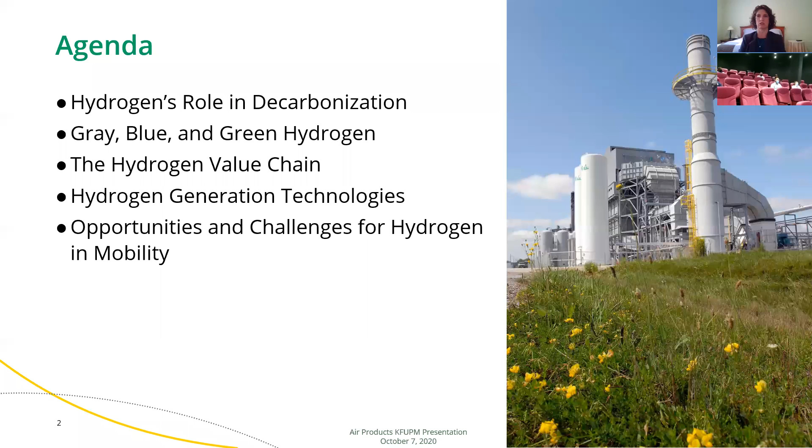So global warming is worsening. Reduction of CO2 emissions is urgently needed. You can see it all over the news lately, the impacts of climate change. If you look over the past century, you'll see that carbon dioxide emissions have been ever increasing and don't look to stop increasing anytime soon. And with this, the global temperature has also been increasing.

As a result of this, we're seeing impacts to our world, our planet, such as melting of glaciers and more frequent, more extreme weather events, things like fires in Australia or the western part of the United States, major hurricanes, and all kinds of record-setting high temperature events. So it's really important that we start to pay attention to the amount of carbon dioxide that we're emitting to our atmosphere to really start to turn this around to preserve our planet for the future.

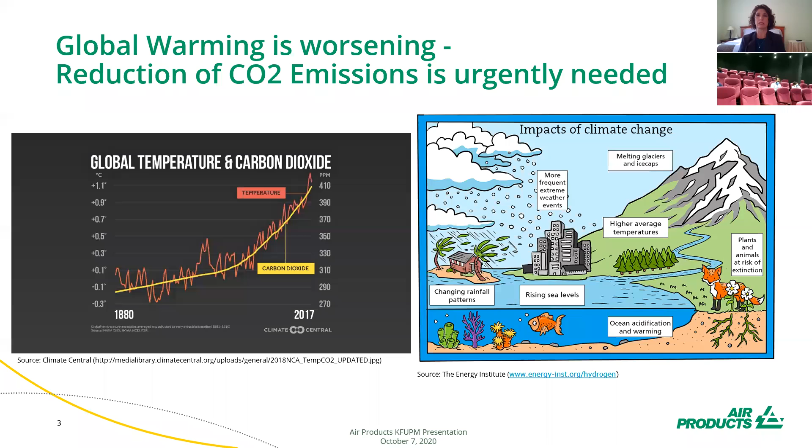So one way that we can obviously do this is to turn to renewable energy, in the form of wind, solar, and hydropower. That is one way that we can get away from the fossil fuels that we've been using over the past century, pulling up from the ground, releasing the energy, and then emitting that CO2 to the atmosphere. But renewable energy alone cannot solve this problem.

If you look at the pie chart on the right, you'll see a breakdown of some of the sectors that emit greenhouse gases to the atmosphere. And what you'll see is that for about a quarter of those sectors that emit CO2 to the atmosphere, it would be very difficult for us to eliminate those emissions using renewable energy alone. And so we need to find another way to do this.

And some of those things that are hardest to eliminate are things like cement and iron and steel and shipping and long distance transportation. And these are all things that continue to grow as nations and regions develop and become more industrialized. So the graph that I have on the left, let me pause here for a moment to see if I can bring up a pointer. So the graph here that's on the left shows the global emissions by various regions in the world.

And as you can see, in the early 1900s, it was primarily the United States and Europe with the Industrial Revolution that was starting to emit a lot of carbon dioxide. But as we progress through time and other nations and regions are developing, you can see places such as China where their emissions have expanded quite dramatically in the recent years, and other regions such as India and the Middle East, which are following the same trends.

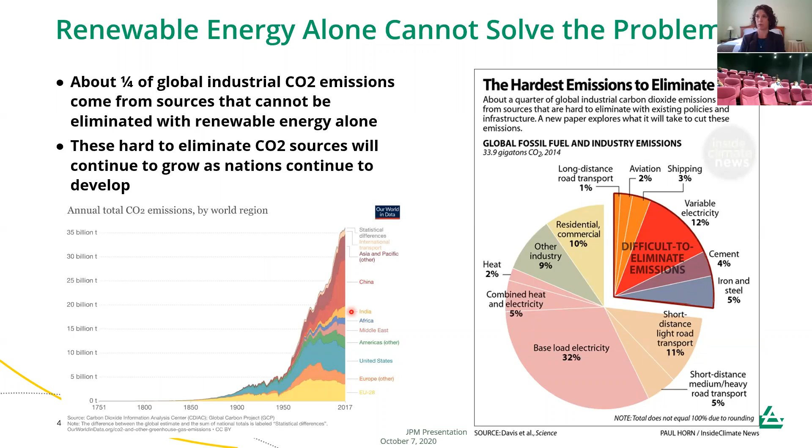So we need to find a way to curb the CO2 emissions that just naturally come about with nations and regions becoming more developed and more industrialized. So hydrogen can be that versatile carbon-free energy carrier that can help us to get there.

So this chart here shows, again, a breakdown of the various segments that emit CO2. And there are some, such as agriculture and forestry, that we're not going to be able to solve with hydrogen. But about 65% of the sectors that are emitting greenhouse gases could be addressed with hydrogen in some way as we move forward, whether it be with building and heating needs, or with other industries, transportation for sure, and even generating other electricity and heat and replacing coal in certain areas. So hydrogen has a big role to play in decarbonizing our world.

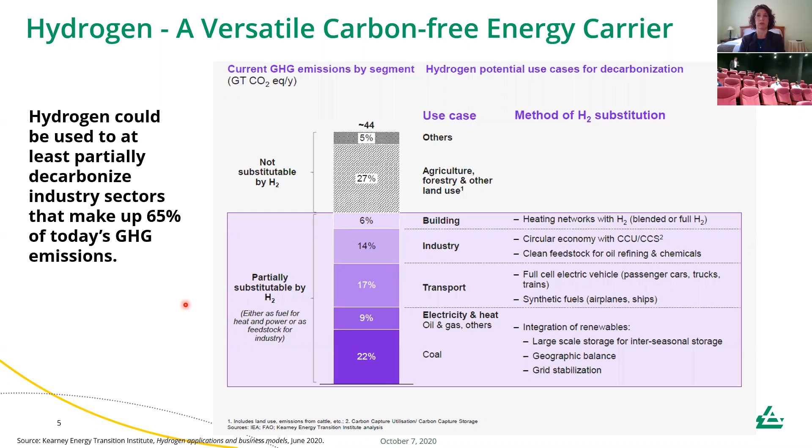But all hydrogen is not necessarily the same. So that brings us to the definitions of gray, blue, and green hydrogen. Gray hydrogen is what you would consider 95% of the hydrogen that's generated in the world today. This is hydrogen that is generated with fossil fuels. It is not low carbon. All of the carbon that goes into the process is emitted from the process. It is released to the atmosphere, and this is how hydrogen is primarily made today.

But we're seeing a shift where governments are starting to enact tax credits and other such things to encourage corporations to decarbonize. And that brings us to blue hydrogen, where we can still use this energy source that we have today, but now with blue hydrogen, we are capturing that carbon dioxide and not emitting it to the atmosphere. And rather, we're either sequestering it or finding a use for it in some other way. So that's blue hydrogen.

And that blue hydrogen could be a stepping stone to get us from the gray hydrogen, where we're emitting lots of carbon dioxide, to blue hydrogen, where we're reducing our carbon emissions, and then ultimately to green hydrogen, which is completely renewable and very low carbon. In fact, with electrolysis, it can be zero carbon dioxide emissions.

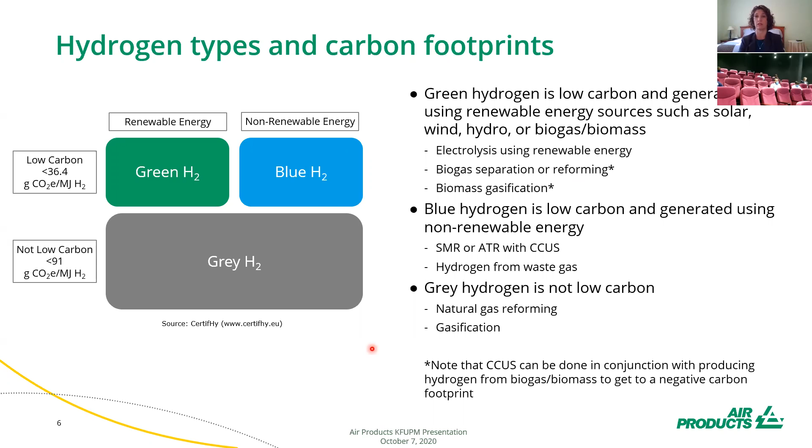So now we're going to move on to talk a little bit about the hydrogen value chain. And I really like this particular slide because it kind of shows how hydrogen is linking natural gas and power together, and how powerful it really is. So here, I'll start at the top with the power grid. There are several different ways we can add power to the power grid. We can use renewable power, such as from a wind turbine or solar panels.

We could use fuel cells, such as hydrogen fuel cells, and we can use combustion turbines to put power into the power grid. That power off of the grid we can then use for electrolysis by adding water and making hydrogen, and that hydrogen can go to end users. We can also make hydrogen in a more traditional fashion from natural gas or from coal or oil or other hydrocarbon feedstocks, and process that hydrogen, remove the carbon dioxide, and again put that into this hydrogen grid, if you will.

And they also show here that we can even potentially take some of this carbon dioxide that's captured and go through a methanation process to make methane to inject in the grid. Or you could use biomass and clean that up and put it into the natural gas grid. But you see here how hydrogen ends up connecting our power grid, our natural gas grid, and ultimately we can use this to result in low carbon energy sources that can be used for downstream processes.

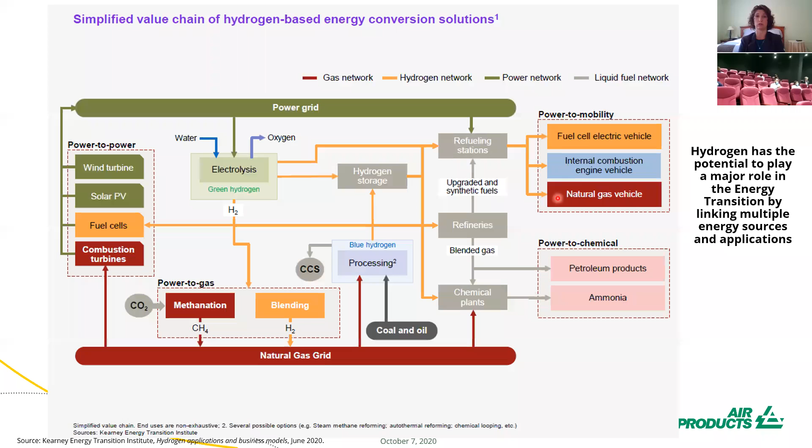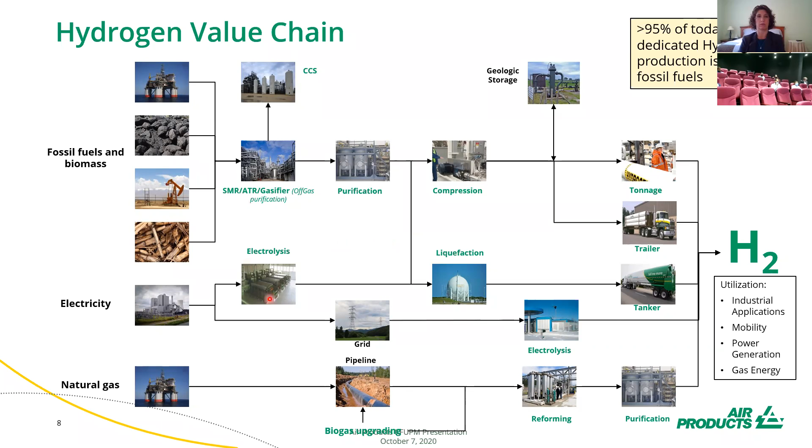So I'm now going to get into how do we make hydrogen? What are some of the means we use to generate hydrogen? Specifically looking at these different reforming and electrolysis methods. So I'll start with showing how different methods of generating hydrogen generate different syngas ratios. So we have electrolysis at the top here that generates essentially pure hydrogen. And then at the bottom here, we have our gasification technologies, which you can see produce a much greater amount of carbon monoxide with that hydrogen. So it's a much lower syngas ratio, if you will, of hydrogen to carbon monoxide in these regions.

Steam methane reforming, you'll see, is very close to the top here in terms of the amount of hydrogen it produces relative to the amount of CO that it produces. And for this reason, steam methane reforming is generally the preferred method of making hydrogen today. Autothermal reforming is a close second in terms of the hydrogen to carbon monoxide ratio that we can generate. And I'll talk more about both steam methane reforming and autothermal reforming in a minute. And then, as I mentioned, gasification generates the lowest hydrogen to CO ratio. And then for each of these technologies, we can use pressure swing adsorption to generate a pure hydrogen stream to purify that syngas. We can also use membranes and again, either adjust the syngas ratio or purify the hydrogen.

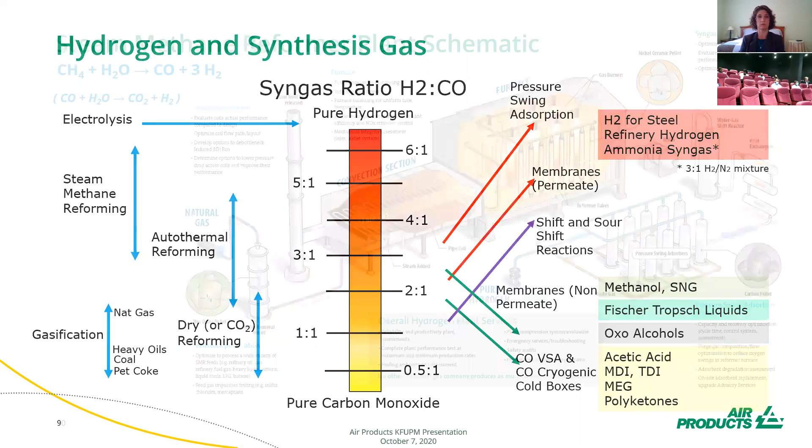So now I'm going to get into a little bit more of the detail around how we generate hydrogen using some of these methods. So steam methane reforming, this is the process, as I've mentioned, that is most commonly used to make hydrogen at large scale today. It is a process that uses a hydrocarbon feedstock, and that hydrocarbon feedstock generally is preheated and sent to some sort of a pretreatment system to remove sulfur from the natural gas or other feedstock that's being used, because the catalyst in the downstream equipment is very sensitive to sulfur.

The natural gas is then preheated in some sort of a heat recovery area. Typically, this stage of preheating will come from the convection section of the reformer. And then the natural gas is blended with steam that is generated via the process and is injected into the steam methane reformer, into these tubes that are in the reformer. These tubes are heated via burners that are spaced throughout the furnace.

Steam methane reforming is an endothermic process, and so heat is required, and the natural gas and steam mixture is reformed in these tubes, and then the hot syngas that's generated exits the reformer and is sent to a boiler where we generate that steam that goes back and is mixed with the natural gas. And in some cases, we also will export steam. The plant can be tuned accordingly, depending on how much steam our customers need. And the boiler will help to start the process of cooling down this very hot syngas stream.

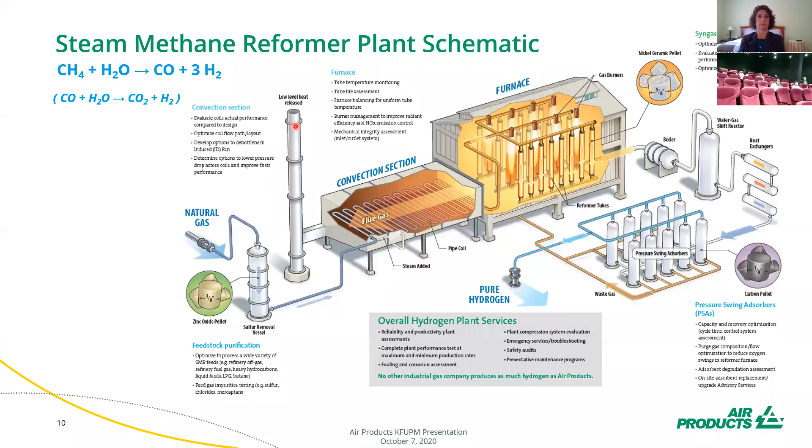So this is how we make gray hydrogen today. But now let's talk about how we turn that into blue hydrogen. So there are three options that we can use to decarbonize a steam methane reforming cycle. The first option is to recover carbon dioxide from upstream of the pressure swing adsorption unit. This carbon dioxide is at high pressure, and it's on the order of about 15 to 17% carbon dioxide in that stream.

And the waste gas from the pressure swing adsorption unit is our second option, where we've essentially concentrated up that carbon dioxide in this particular stream. However, this stream is at very low pressure, probably about a third of a bar pressure. It's very low pressure.

And then our third option for recovering carbon dioxide out of a steam methane reformer is in that post-combustion flue gas that I had mentioned in that convection section, where you could recover it there. But again, this stream is almost at atmospheric pressure, and so it is at very low pressure, and therefore much more difficult to remove the carbon dioxide.

As such, the easiest way to remove carbon dioxide from the steam methane reforming cycle is to recover it from the higher pressure process gas. In doing this, it's possible to recover about 50 to 60% of the carbon dioxide generated by the process. There are people looking at other ways to recover the CO2 from some of these other lower pressure streams cost effectively. But today, cost effectively, you can generally recover about 50 to 60% of the CO2 from a steam methane reformer.

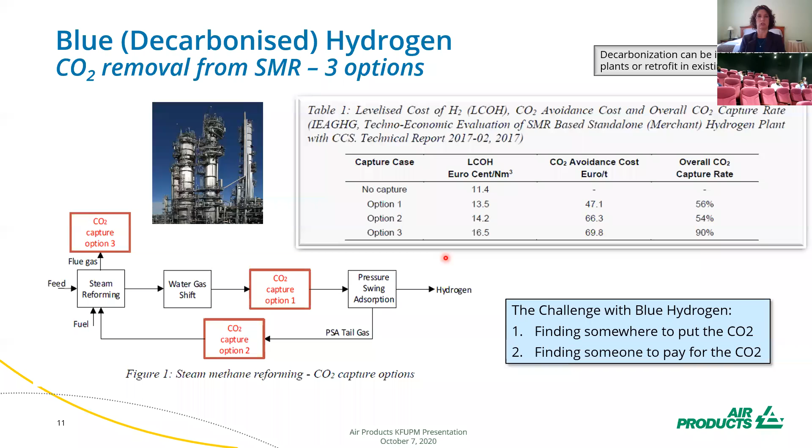So I want to talk about another potential way to do a blue hydrogen plant, and that is with autothermal reforming. So autothermal reforming is today often used for generating syngas for processes such as methanol synthesis. And it just happens to, if you remember that column that I showed, generate a good syngas ratio for those types of processes.

An autothermal reformer, again, uses a hydrocarbon feed, typically natural gas, and preheats it, very similar to an SMR. Again, it goes through sulfur removal and another reheating step. In this particular flow sheet, we're showing pre-reforming, which we can also have in an SMR. I forgot to mention here, there's the steam addition, same as an SMR. The natural gas and steam mixture then passes into the autothermal reformer, where oxygen is used, and there's a catalyst in the bottom here. And so in this case, the heat generation and the reforming are all done within the same vessel, unlike an SMR where your furnace is separate from your process gas.

And for this reason, that the heat generation and the reforming are all within the same unit, all of the syngas is at pressure exiting the reformer. It's very similar in that there's also a boiler and another cooling train, just like an SMR. But with the synthesis gas at high pressure, we can do this CO2 removal in essentially the same location as an SMR, upstream of our hydrogen purification. But here we can recover around 95% of the CO2 because we don't have that furnace with that flue gas coming out of the furnace with very low pressure carbon dioxide.

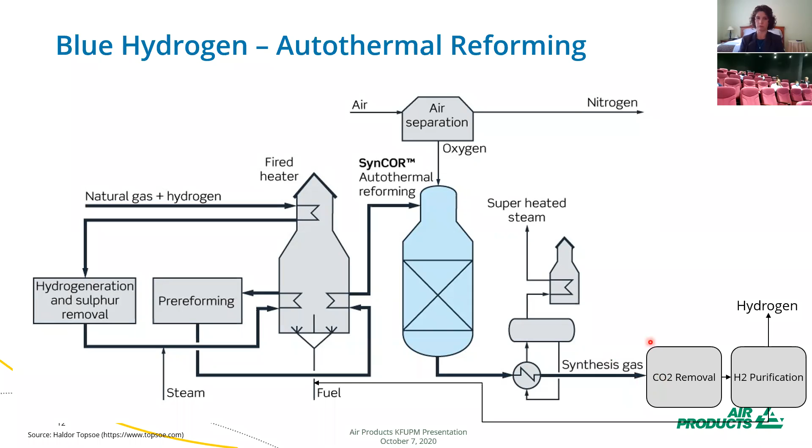And so this chart, just to give you a little bit of perspective here, this is an SMR here, CO2 emissions with no carbon capture. And over here we have an ATR, again, CO2 emissions, no carbon capture. You can see they're about the same. And then when we add carbon capture onto an SMR, the recovery of the CO2 is, as I said, about 50%. And for the ATR, it's closer to 95%. And this is for the direct CO2 emissions here, to look at the gray bars in this chart.

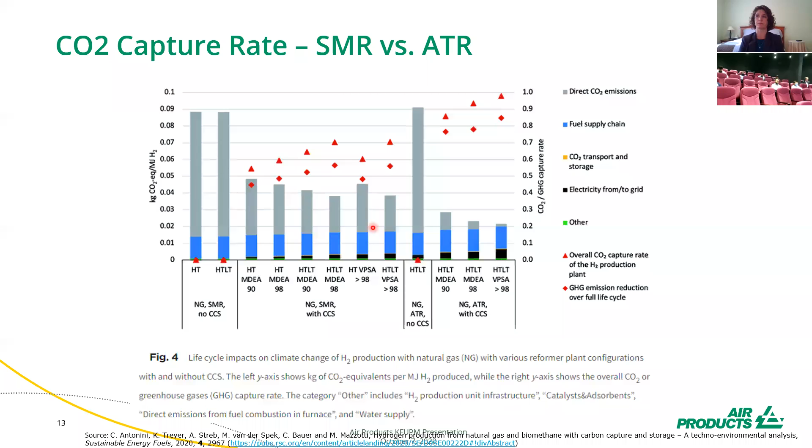Okay, and the final type of hydrogen generation I'm going to address here is water electrolysis. And this is a means of making green hydrogen with no CO2 emissions. So for electrolysis, we have electrodes and catalysts with low overpotential that allow for these high reaction rates. There's an electrolyte that's used in an alkaline electrolysis cell to provide high conductivity. And so a current is applied to this electrolyte solution, and we're able to generate hydrogen

and oxygen. As you increase current, you increase the hydrogen flow rate, but there is a limit to the amount of current you can add because this results in efficiency losses and some thermal issues, as well as cell degradation. I'll talk in a minute about some of the challenges with electrolysis, but some of the challenges are around scaling up of these systems.

Another operating concern, if you will, with electrolysis is the safety and reliability of these units. And that limits the operating pressures and temperatures of these units, because you want to avoid any kind of separator rupture or cross diffusion or electrolyte leakage.

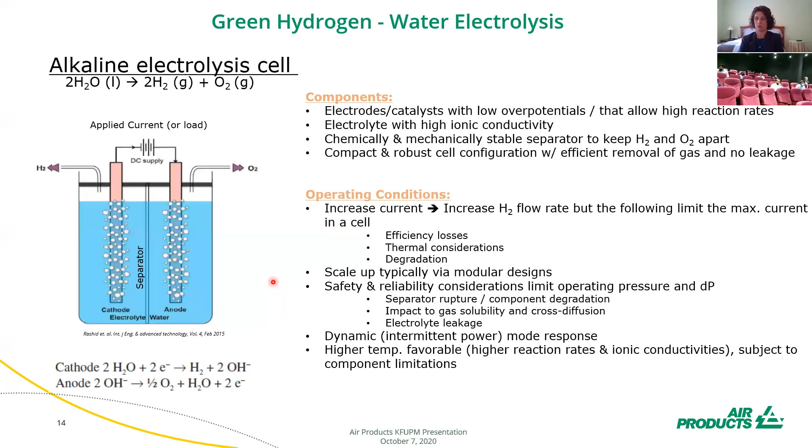The alkaline electrolysis has been around for quite some time, and is the more established technology, I'll say, today. With the PEM electrolysis, a lot of development is being done in this area. And there's also, you may hear about solid oxide electrolysis, which is another type of electrolysis that is also being studied right now and developed.

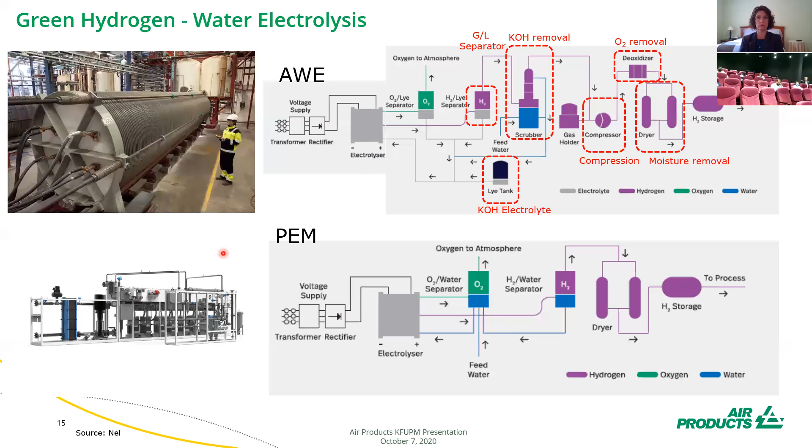So some of the challenges of green hydrogen via electrolysis: the technology itself, as I mentioned earlier, there are scalability issues. Current electrolysis facilities using green power are of small scale. If I presented this back last April, I would have been telling you that the largest was 6 megawatts. But now, more recently, there's been a unit that was started up that's 10 megawatts. That generates less than 3 tons per day of hydrogen, which is not a very large amount of hydrogen, but that is the largest system that is currently operating.

But the largest electrolyzer modules available today are about 20 megawatts. And so these units end up getting manifolded together to form these larger systems. So there are limitations on the size of the electrolysis stacks today.

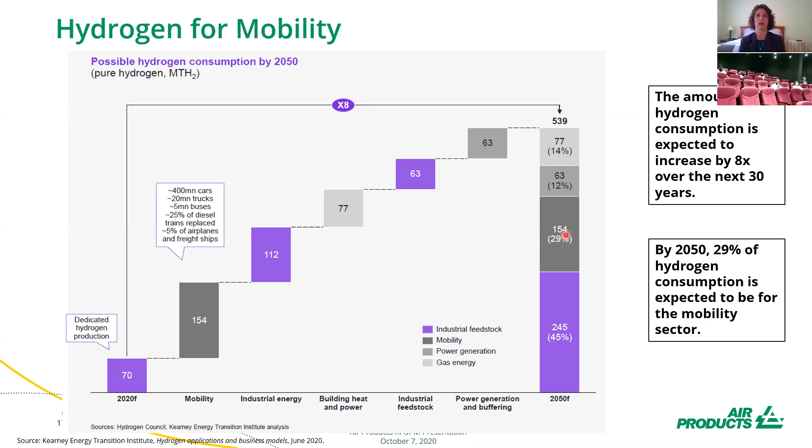And when we look at the projections for 2050, it's expected that 29% of this hydrogen consumption is going to be for the mobility sector. So it's expected that by 2050 we are going to be generating more than twice as much hydrogen as we consume today, just for the mobility sector alone, 30 years from now.

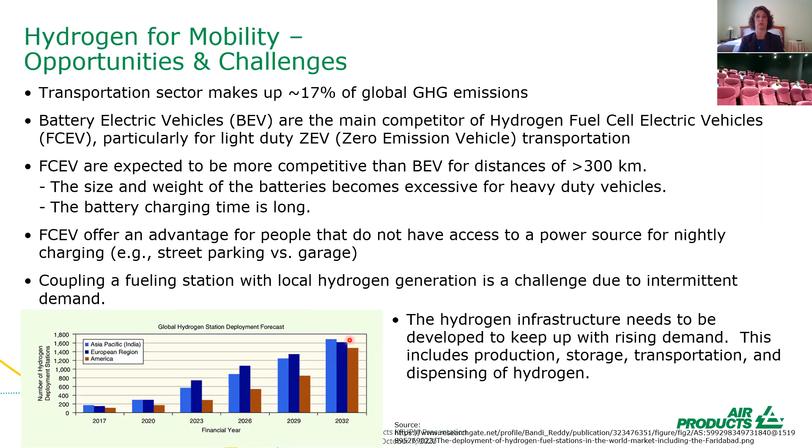We're expecting that to grow to be well over 1,000 in each of these regions just by the early 2030s. So we're talking like 10 years away. So it's expected that there's going to be a significant ramp up in these fueling stations over the next 10 plus years.

So in summary, the use of fossil fuels to meet our energy needs is not sustainable. Our planet cannot tolerate us continuing to put more and more CO2 into the atmosphere. We need to transition to renewable energy to save our planet. And hydrogen is that versatile energy carrier that's carbon free and can be used to decarbonize many of the energy consuming sectors. And although most hydrogen is generated with fossil fuels today, blue hydrogen can be that stepping stone to get us to the green, completely carbon-free hydrogen.

But there are many challenges to building that hydrogen economy, as I mentioned a couple of them here. But our world is counting on us to solve these challenges. And I think that with the program that the King Fahd University of Petroleum and Minerals has for students in the hydrogen for mobility area, all of you are going to provide a great amount of value to this growing area and help us to get hydrogen more mainstream as the energy of the future.